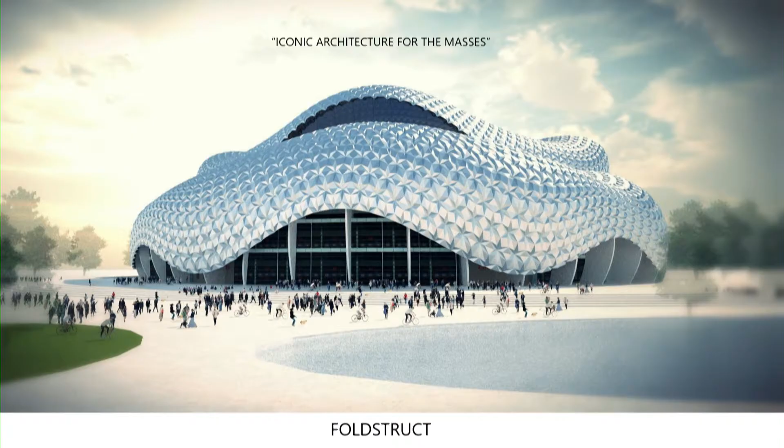So my main message with what I try to do is bring iconic architecture to the masses. I do this by exploring different types of building mechanisms. My main interest at the moment with Foldstruct is on folding as a mechanism of building. So instead of connecting individual small segments, we're talking about how to fold complete 3D elements.

So to talk a little bit about where we are right now, we have just gone through the digital revolution, which means we've gone from pen to paper to screen, from 2D to 3D, from local to cloud, CAD, BIM, AR, VR, AI. Soon we're running out of letter combinations. But all of these are representing our shift from the physical to the digital.

What this has created is a new generation of architecture that's redefining architecture, but also stretching the limits of how we want to view the society and how we can see the city of tomorrow.

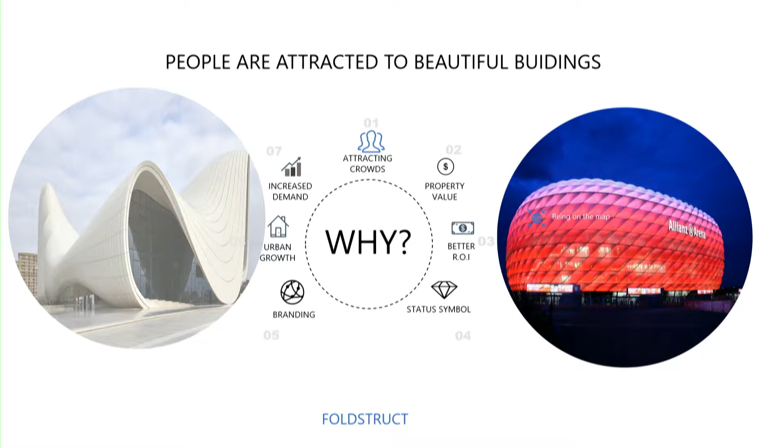So these structures, you may know, could cost up to 20 times that of a standard building, and yet they're still being built for the very simple reason that people are attracted to beautiful buildings. They will go from one side of the world to the other to see a pyramid. They are inherently attracted to beautiful architecture, and it is my belief that we should try to bring more of that, and more people deserve to enjoy that than the small segment that we have today.

So the main problem is the means of manufacturing, and as with the first industrial revolution, when we can change those, we can make a real impact on what we are creating.

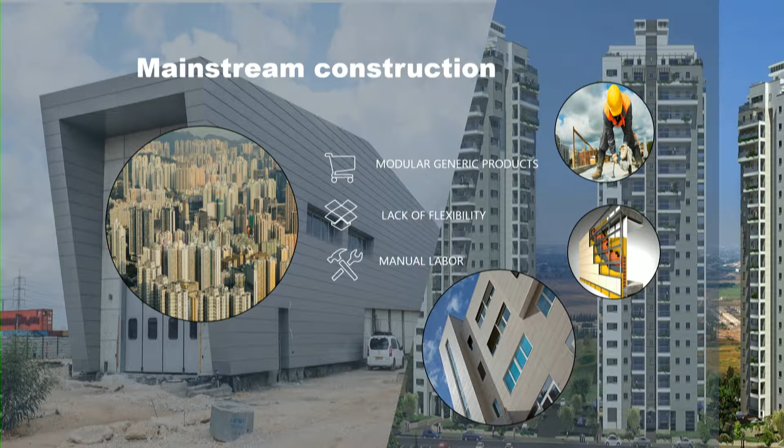So this is mainstream construction, unfortunately, today. We're seeing blocks stacked up one on top of the other, modular generic products, lack of flexibility, and manual labor. Now, yes, we can automate drawing plans, and we have all these great technologies for managing the building, and we're talking about optimizing.

But I think the question we have to ask is, what are we trying to optimize? Are we so happy with this that we'd like to see more and more of that? Or do we want to make building technologies that will allow us to transform this into something closer to what we see as an ideal?

And the main problem is the unique and complex elements. So when you have something curved or morphed, that means it's constructed from many, many, many types of elements. And that is a problem when we go into the manufacturing world.

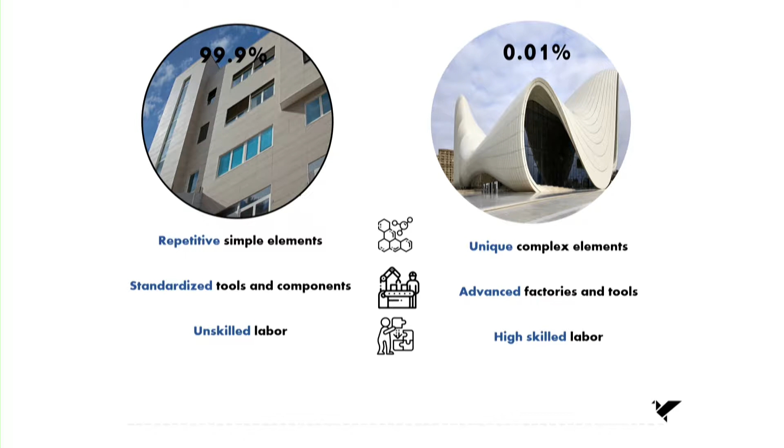So I worked as a parametric architect at a large office, and one of the main issues was that they brought me in for designs, but when I did those designs, slowly, meeting after meeting, the curves became less curvy.

From 3D, it became 2.5D, and in the end, it looked something like a cube with a small dent on it. So that was something that I realized - that if I wasn't going to change for myself, being a young architect, I would forever be locked in the digital realm. And so I did a master's in Detmold University and started a path of exploration of how I could maybe try to manufacture the things that I design.

So why folding? As someone by the name of Albert Einstein once said, things should be made as simple, but not simpler than that. And the idea here is that we need a mechanism which is simple enough and minimalist enough that we can use and can also adapt. But we should not simplify something to the place that it's completely repetitive.

So for me, the question is how to go from digital to reality. This is a project that I built with the support of 3A Composites, Alucobond, and Detmold University of Applied Science. And this was actually a project that came as a byproduct of my thesis, which tried to ask that question: could we use folding as a mechanism of construction? So using that material that we use today just for cladding, could we make that the actual structure, something like origami? And of course, I don't work alone in this field.

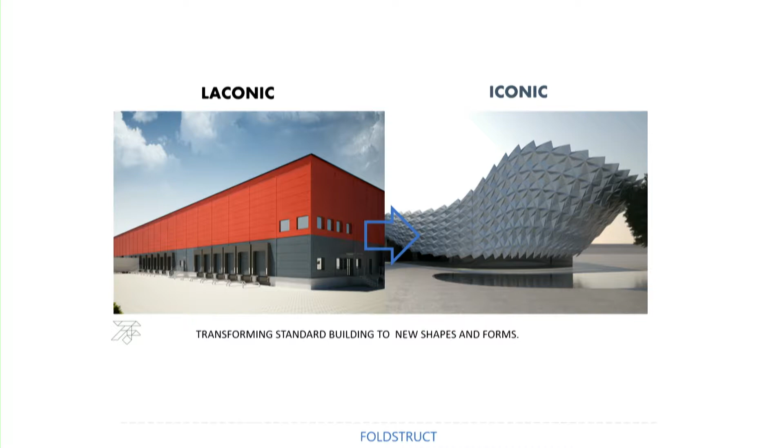So the idea is to go from laconic to iconic. Could we take a standard building like this and give it a facade? If we don't have the barriers of the costs, what would our world look like?

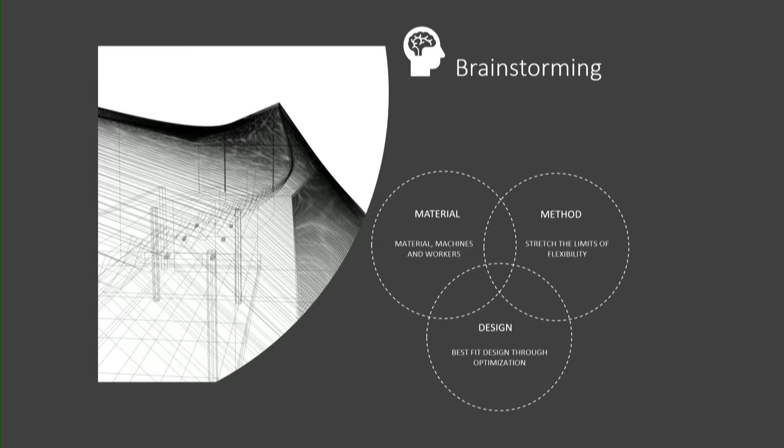The way that I work is, I would say, with a trinity of material, method, and design, where I could start with any one of the three, but they all have to match. So if you start with a material, then you kind of have to find your limits, and I think that is the most important thing - to first follow the limits, and from that you can work your way.

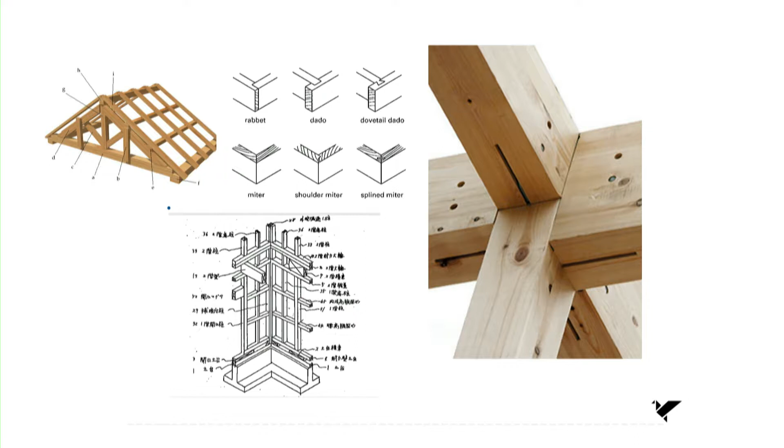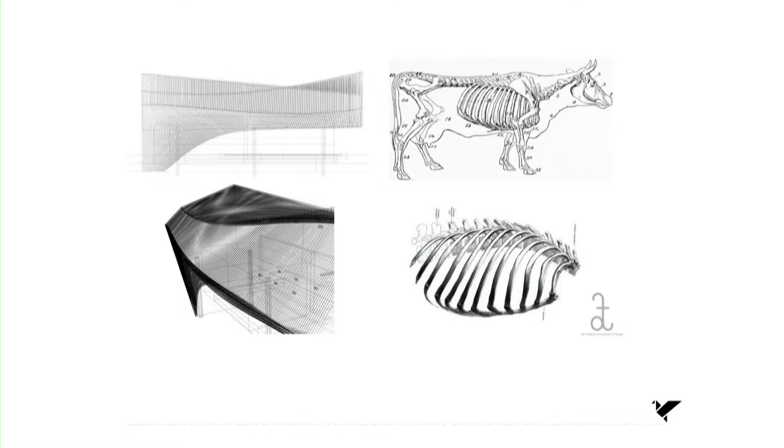So here's a project I did with wood, which takes Japanese wood joinery and asks, okay, we have that orthogonal angle. What if we learn to play a little bit with the cutting and produce things that would look a little bit different? So being inspired, of course, always by nature and how things can morph and yet still be in the system, I tried to take that and play a little bit with wood logs.

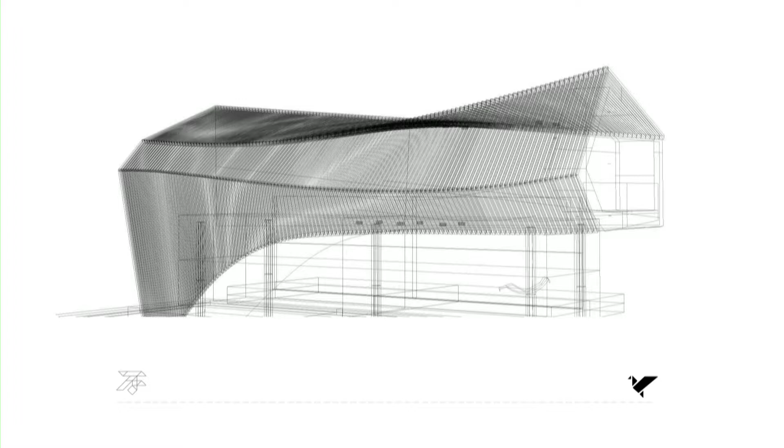So this is a design for a house whose shell is made out of simplified wood logs that are just cut at different angles. You can see here that all of the designs that I do, I work on parametric design and try to reach the exact angle for each specific element in the initial design. So not just designing and then bringing that on to a company, but actually trying to solve that and getting the form coming from the actual detail.

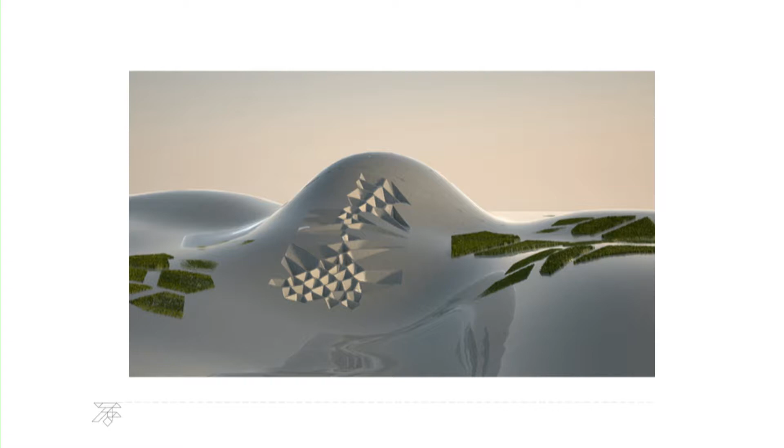We can also do the same here and build other things. And the idea here was, how do I take that system, which is also orthogonal, and turn that into something a bit more amorphous? How do we take a structure like that, which I designed completely freeform? Could I be able to build that from wood logs or something close to it and come to results like this?

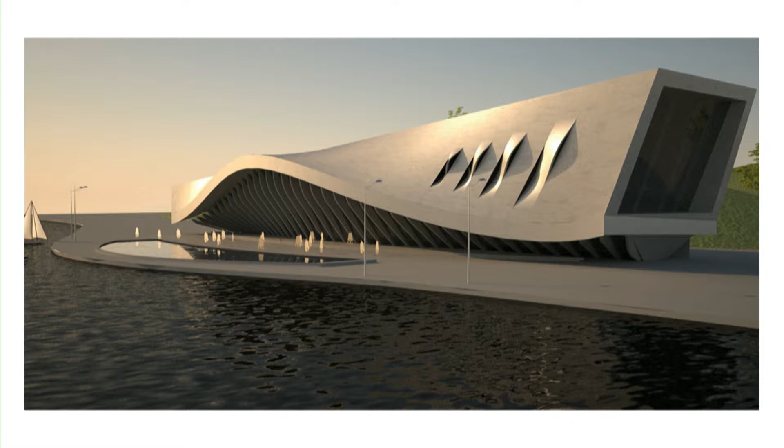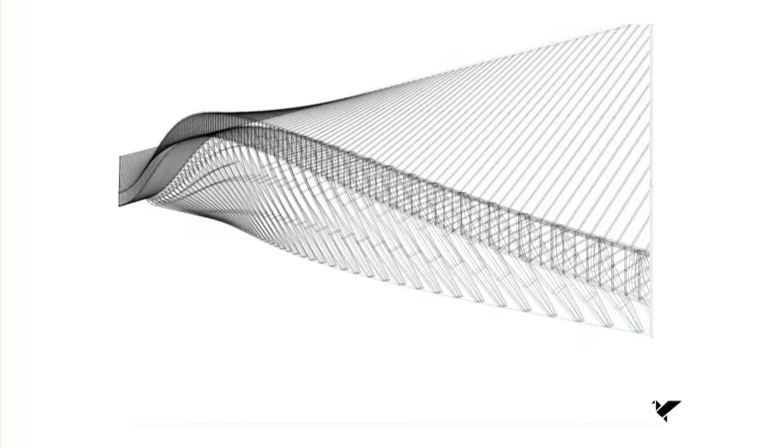This project was a competition for a marine museum, and the idea here was to play with straight lines. So even though this is curvy, it still works on the geometry of ruled surfaces. And here the idea is not to bend an actual surface, but to build that out of straight elements that could later be used as substructure, as rebars, and as elements which are always needed. So you can see here that the design, again, always working side by side.

So now coming to the Foldstruct project. When I started out, I didn't have too much of an idea of what folding can do, but the idea was to explore it and ask if we could create a structure out of a piece of paper just by playing around with it using our hands. What if we apply a bit of logic, just like in origami?

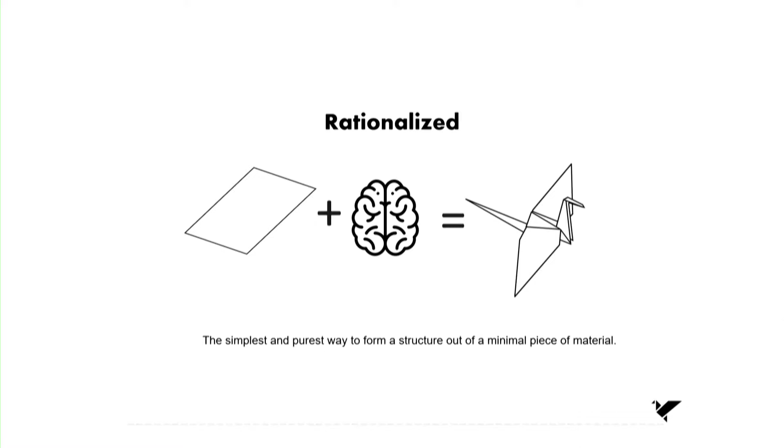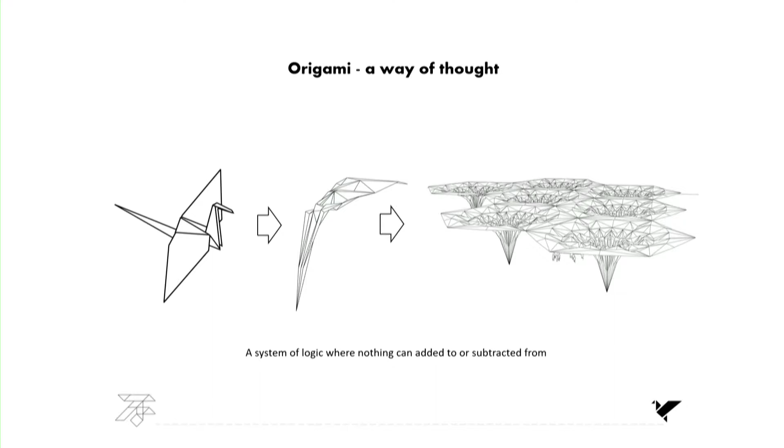If we take that same mechanism and apply some kind of logic, we reach these kinds of elements. And if we can fold a paper crane, maybe we can also fold a structural element, maybe combine them together. That's when I set out on a journey to explore what could be created from those.

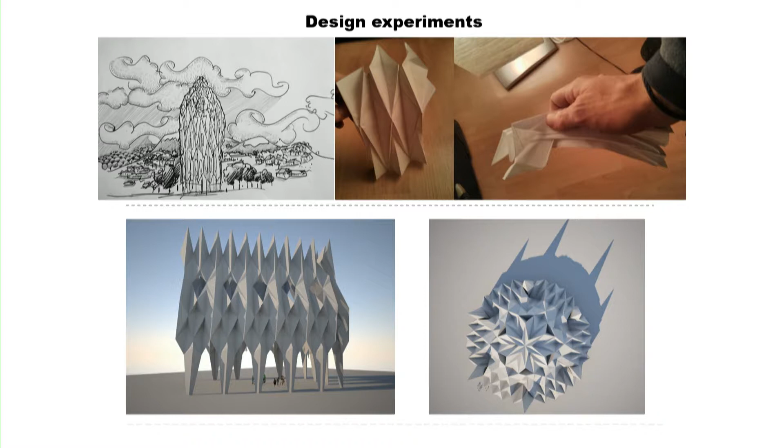Starting with some initial experiments, I always like to explore the opportunities and the visual aspects, without going into the scale of exactly how it's going to be done. But I think there's a large potential in approximating different types of geometries with folding morphologies.

One of the things I like to follow is folding as a mechanism, as a science, and as an art, because I think it really combines all of them together. I work and develop different types of patterns, and each pattern for me is a representation of a geometrical family that could come out of that pattern.

A typical day for me can look something like this, folding a lot of different patterns. I have a few hundred of them which I kept, and each one is maybe a glimpse of what could be made if we work on that pattern and think about what it can be in the future.

The main interest here is that we can follow Gaussian curvatures and describe forms that seem free-shaped at first. We could define those with mathematical relations and ultimately fold them.

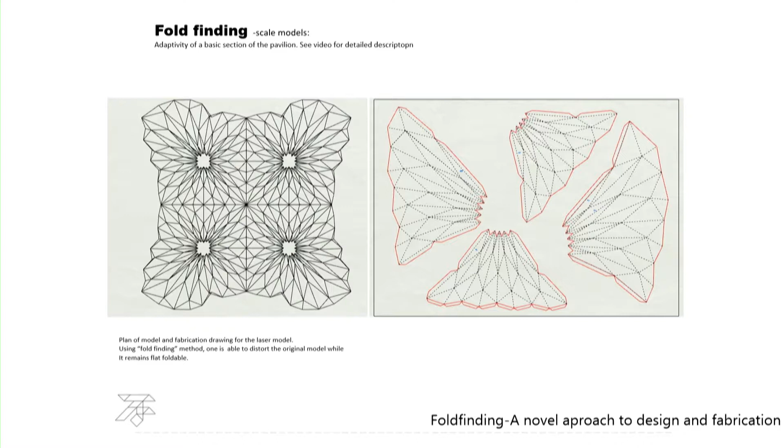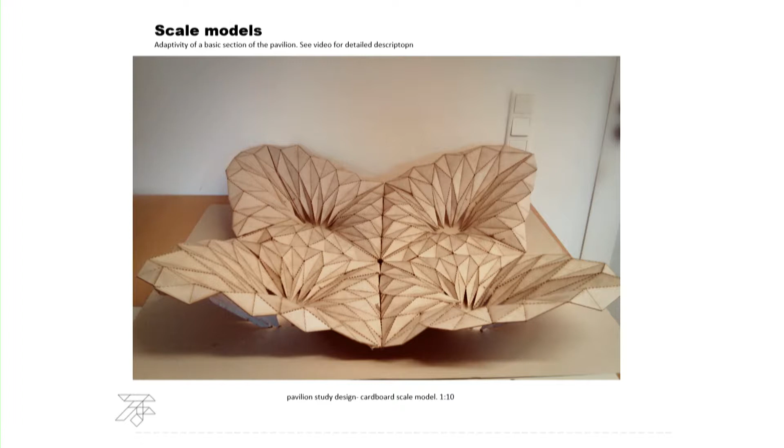Going back to experiments, the main issue with folding is that you're designing something in 2D and you're not sure what you'll get in 3D. The art of origami has always worked by having a vision and making that in 2D, then getting somewhat of a close result. In architecture, unfortunately, it doesn't work like that — we have to know exactly what our boundaries are and how it looks and behaves in the three-dimensional realm.

Exploring a little bit the different types of patterns and population strategies, we can take one module and from that build our way to complete structures.

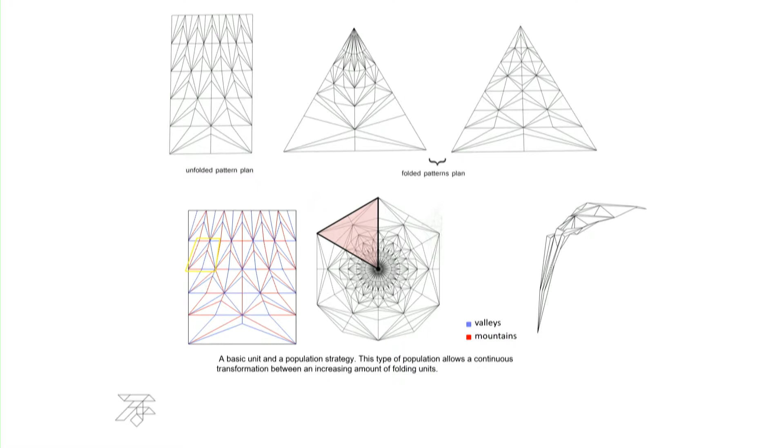One of the things I do is play around with renders like all of us, and I try to find variations of what I would like this to look like in the end without actually having a plan. I have a great love for Japanese arts in general, and I always try to combine different types of arts.

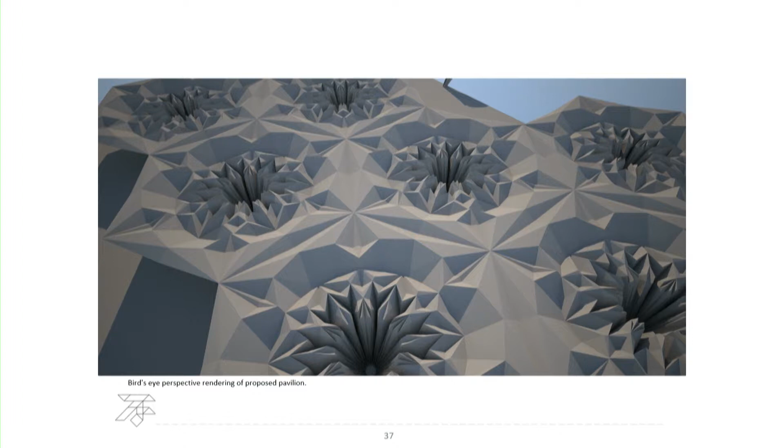Here's a pavilion design that tries to take this module and upscale it. The initial design for the pavilion was done in many different forms, and the idea was to find what my limitations are.

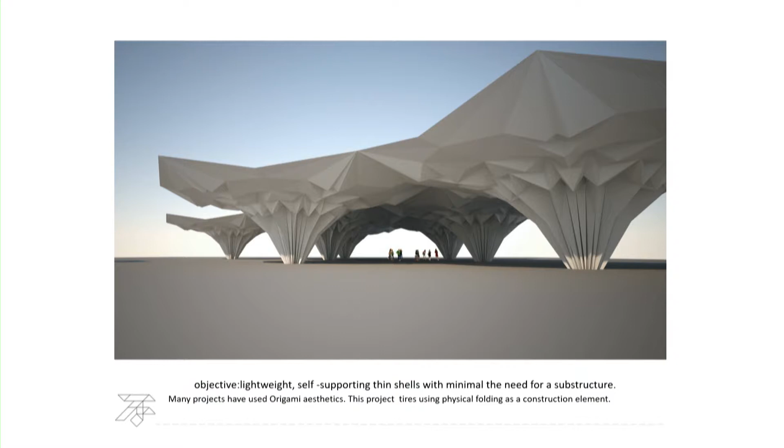Of course, we have a CNC router and certain materials, and we're very much limited to what we can build. The design should also be a tool to limit ourselves and get to the ultimate design in the end. This was the actual design I started out with, but then, as you learn these restraints, you see that not everything you can think of can be folded or manufactured — there are so many other factors that have to be taken into account.

This is a bench that was created with one sheet of aluminum — a 4 millimeter ACM panel. I was lucky enough to be supported by the team at 3A Composites and Alucobond, who were very keen on seeing what could be done with new materials.

This bench was actually the first example of this kind of structure, because we could fit about 3 people, or 300 kilos, on it without it breaking, with only 4 screws connecting everything. Compared to standard fabrication, where you'd have to weld each piece and then repaint it, I think this is a very efficient way to design and build.

So the way I like to look at it is complex algorithms, but always simple construction. The moment we step out of the simple construction realm, that's when we have a lot of problems. Unfortunately, I don't, and I think young architects in general don't have the privilege of having Arup or Buro Happold or all these large companies behind them.

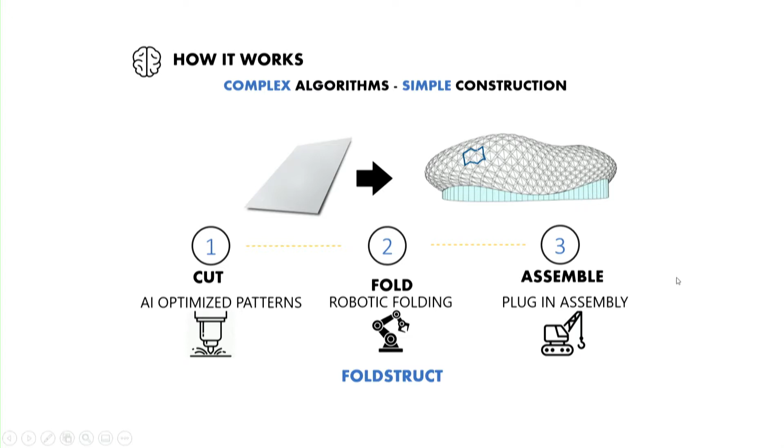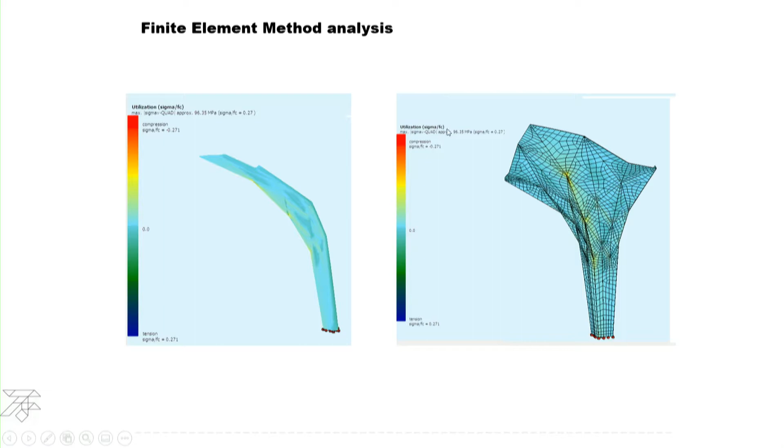So we did some finite element analysis. Here, the first step we did was a simple thin shell, which assumed that it wasn't folded, but just coming out of a mold. And the results did not fit with what we wanted, since we are, of course, folding everything. And then we thought about the fold as a structural member.

How do you take into account the actual fold and embed that in the final static analysis? It's very important because when something is done in such a way, you have a lot of forces that you are adding and also taking away from the material.

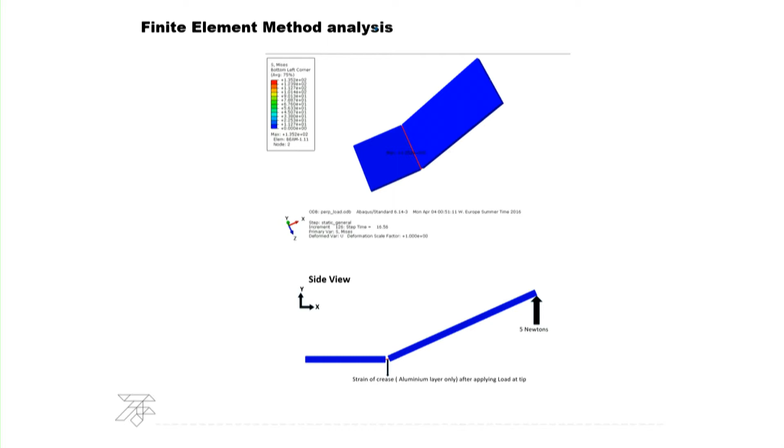So this one example gave us a new model to make an analysis that was much more correct, but also parametric, coming directly from a polygon model. So we don't have to go to every piece and make an optimization, but it's kind of a direct workflow.

So here you see the initial design, which does not have these folds embedded, and then you can see the forces have a different way of flowing than when you actually embed them. Because when you fold, all of the forces are flowing through the fold lines.

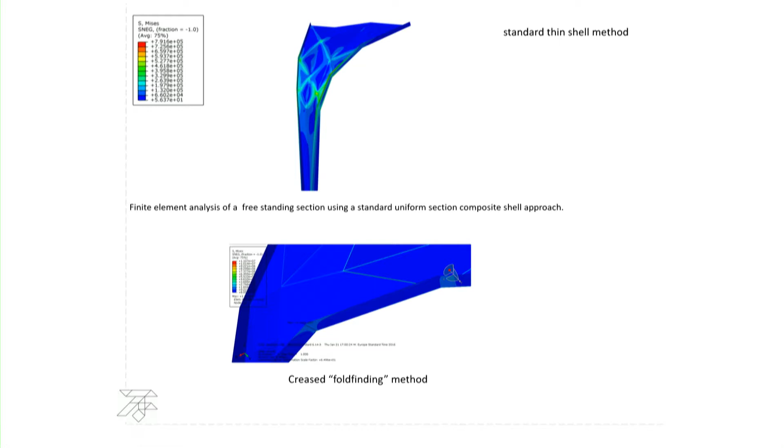One of the interesting experiments was when a part of it collapsed, we were able to bring it directly back up with no damage because it just collapsed along the pattern. So that's a very interesting attribute about these things, is that they don't stretch or deform when you are folding them, but only along the fold lines.

So the actual fabrication here was a very long process, but if we count the actual fabrication time without the long breaks, it did not take more than 10 days. And what was interesting here is the lightweight.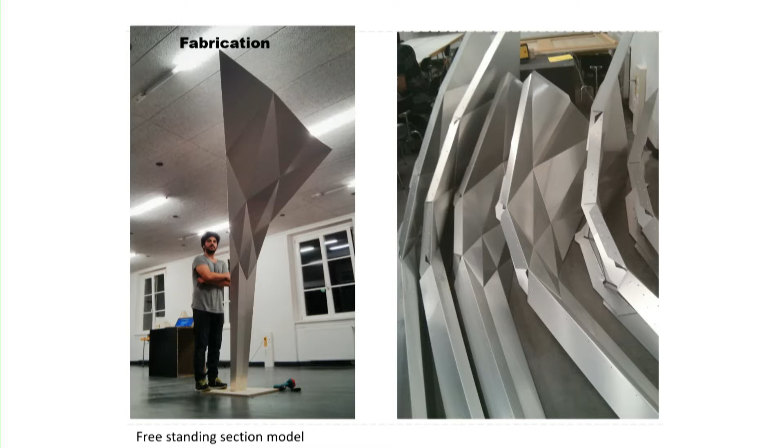So here I'm not supporting this in any way. It's bolted down to this little wood plate, and I'm holding the wood plate. You can see this element here weighs less than 10 kilos, so we were able to work in a very efficient way where one would be just holding it and the others would do the screwing.

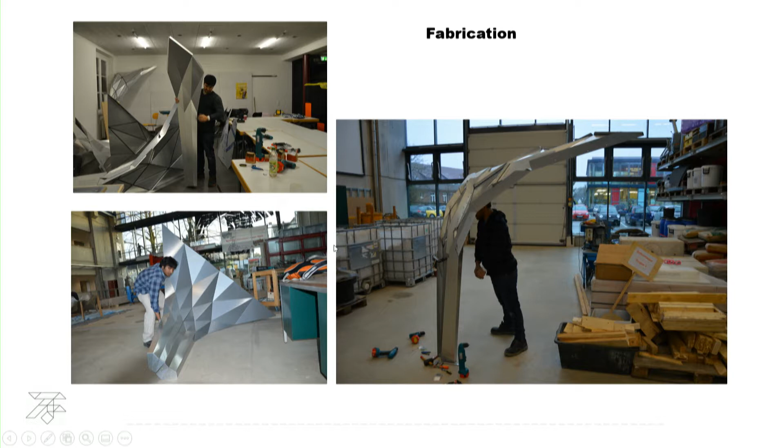We were actually two people doing this, me and engineer Muali Manoj, who also helped me with the engineering of this. This is what it looks like in the end. And you can see the main advantage here is that you have very, very high precision.

And if you wanted to build that in a standardized way, you would need a lot of nodes, and every node would need to be unique. And the prices of such a thing are extremely high and unfeasible for everyday architecture.

So if we can minimize the substructure, the nodes, the bars that we need—I'm not saying we have to give everything up, because sometimes we tend to take a vision a bit too far. So it's all about finding the way to reduce the expensive elements, and that was an interesting example of that.

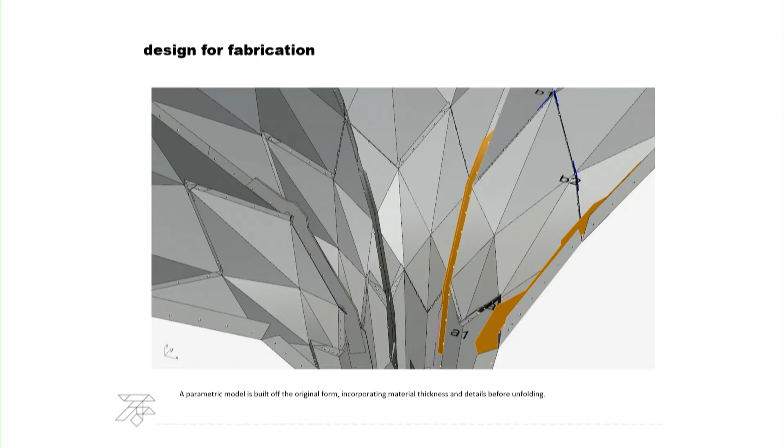So the design for fabrication here, everything including the thickness of the material, the screws, and the overlaps, was taken into account directly from the polygon model, going into the finite element analysis, and having basically a workflow that allows us to take any form, optimize it, and then bring that directly to the manufacturing floor, having done all of the analysis that is needed.

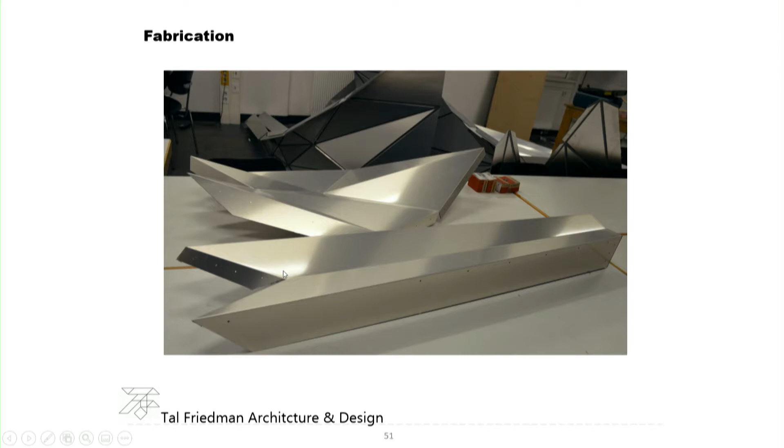As you can see here, these sheets were constructed out of the folding, and you can see all these different plates which you would normally have to either weld or connect. That was all done by folding, and then this thing came together to form the final shape.

So here you can see what this was like on the backside. I'd like to share with you a movie that describes the whole process of how we built it and also where we see this going.

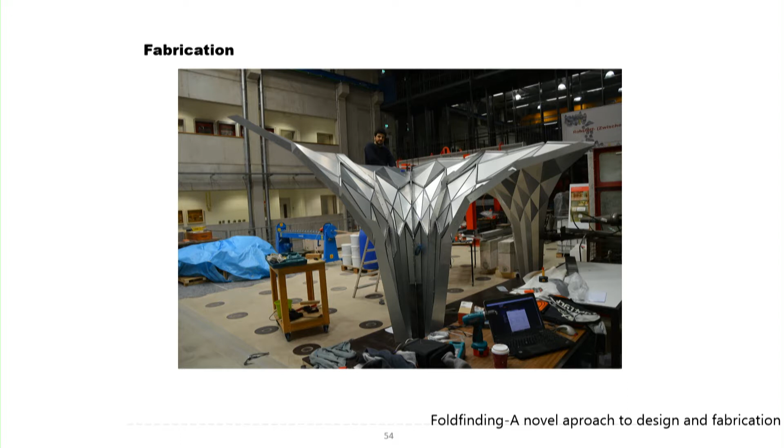Everything we did here used complex, or maybe simplified algorithms, but we had to do this manually. This is basically a project that asks how we can do something with the least amount of effort possible. While we did this manually, all the cutting was done with CNC. But the next step is to make the folding robotic.

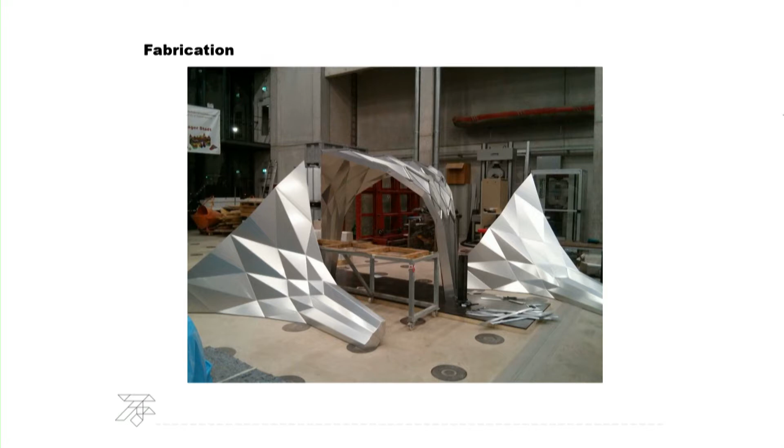So we had Boston Dynamics. We have a huge robotic movement right now, and looking into autonomous construction, if you don't need the mold anymore and you don't need those heavy processes, how can you bring sheets on site, fold them, and get any form you want? That's the question we're trying to solve at Foldstruct.

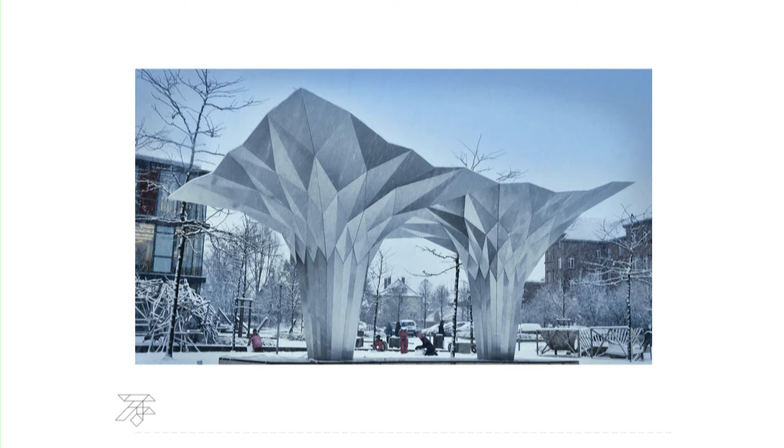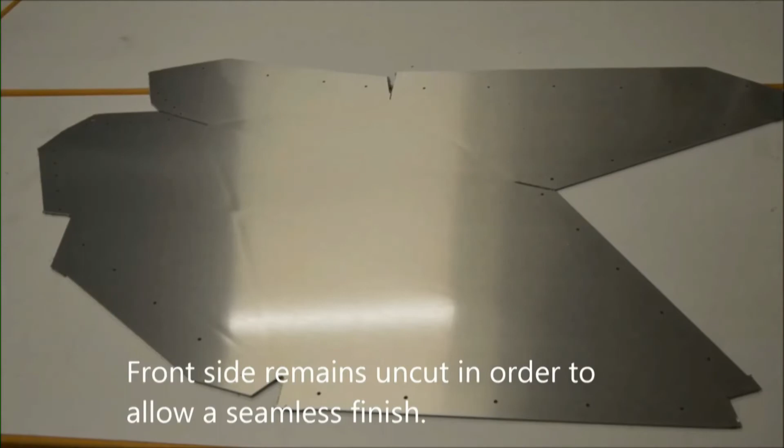So now I'll share the movie and I hope the sound works. You can see here the process of getting every single piece milled out, folding it according to the path that we know.

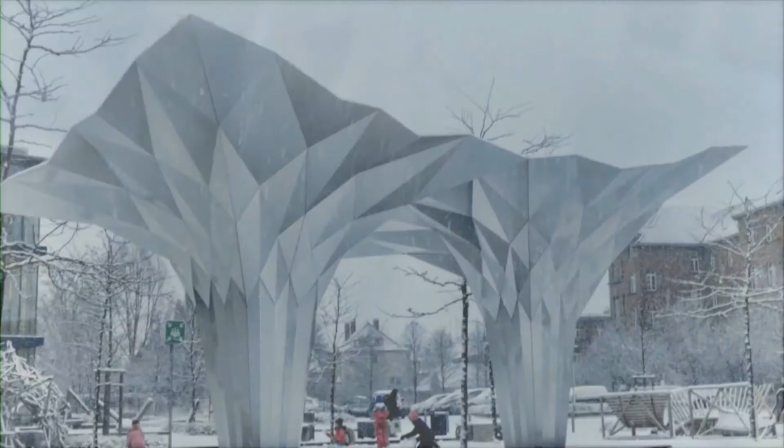And then I'll move on to describe how we actually built it. This is what we just talked about.

And this is the autonomous folding. Here what's interesting is that we're going beyond the design and into actual dynamics, asking how do we deform something from 2D to 3D in reality?

What is the path that one has to make in order to reach it? And how can we describe that in a mathematical way that could be transformed to a computer and then to a robot ultimately? Because what looks very random actually has very precise math. Even when we fold a piece of paper and get a huge mess from it, there is an underlying logic, and this is what we're trying to solve.

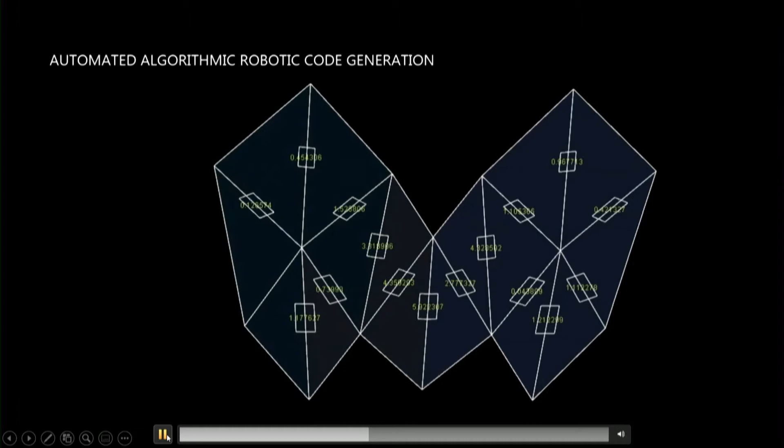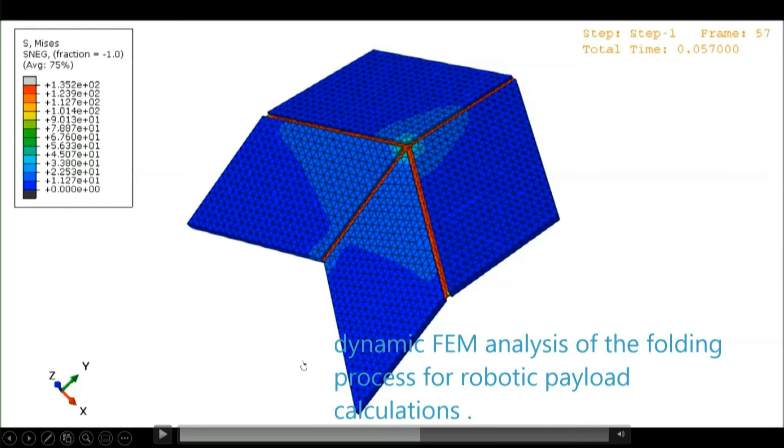So this is how something like this would work. Attached to a KUKA robot, we could then take these and place them on site. Finite element analysis can show us how the forces actually behave during the fold process, which is very important for the robot to know how much it needs to fold and how much force it needs to apply.

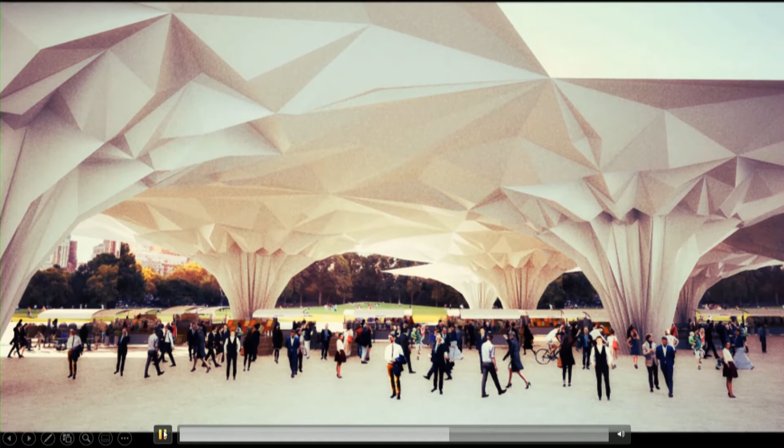Going on to Industry 4.0, how do we turn the work site into a factory? These are standard panels, and we're taking exactly the same method and applying it in a different way — same materials, same methods, but done a little bit differently.

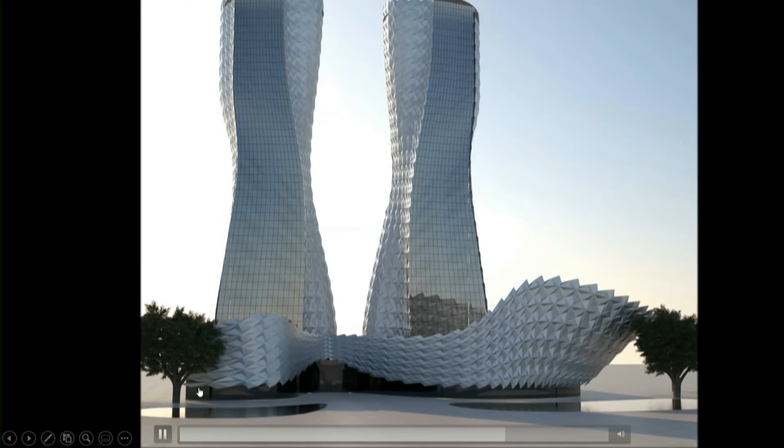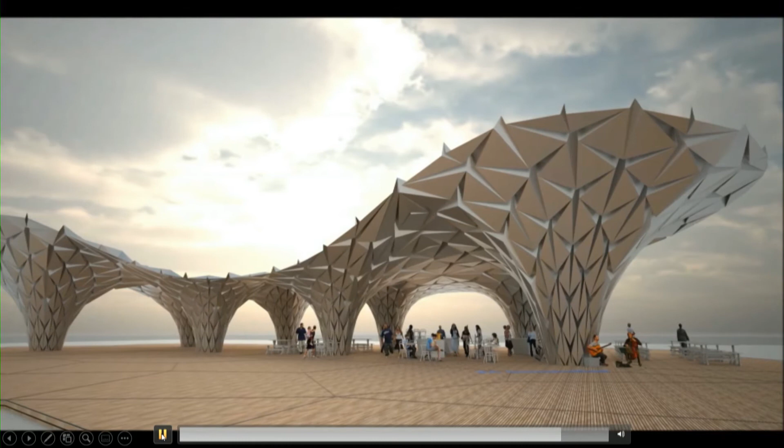And then different types of applications that we can have. Some of them will be modular and some of them can be morph. This is a new pavilion design, hopefully to be built sometime soon.

Sorry about that. And for the next one...

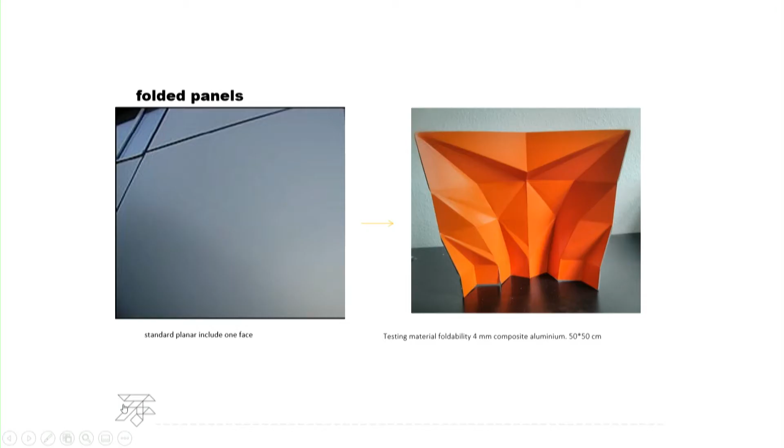Okay, so the main question is the applications. Let's say we solve all of this and have a working mechanism — what can be done besides pavilions? How could this affect something like the facade market, which I think is one of the most influential aspects of a building? If we look at house costs, the facade is what makes a building iconic or not, and I think the most influential thing architects can do right now is work on building envelopes and facades. Here is my take on that.

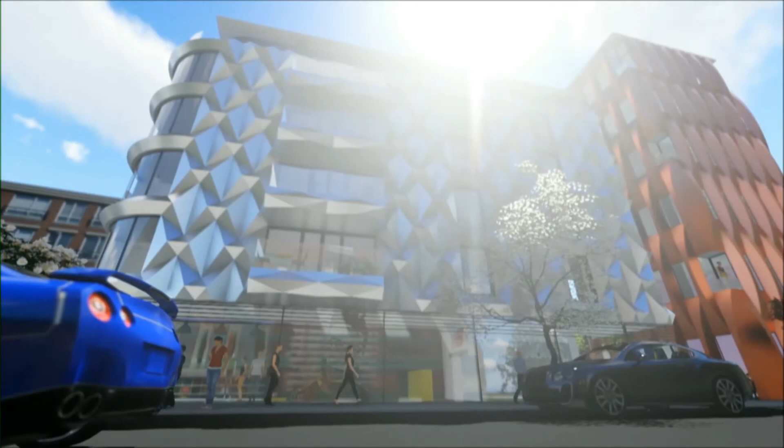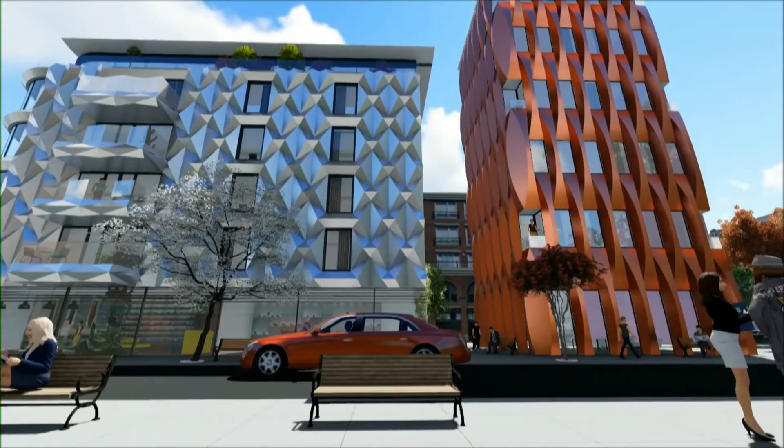So the idea was, how do we take this and apply it in a certain city, or how many could actually be built like this without it looking like more of the same? Here you'll see some design experiments ranging from modular, curved folding, regular folding, and then going on to something a bit more freeform.

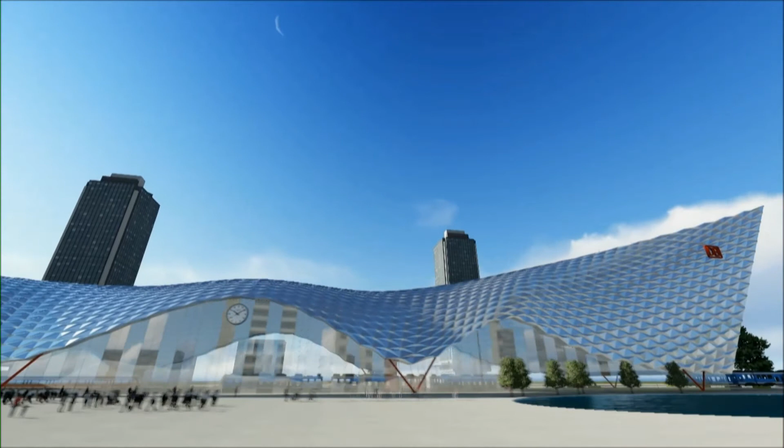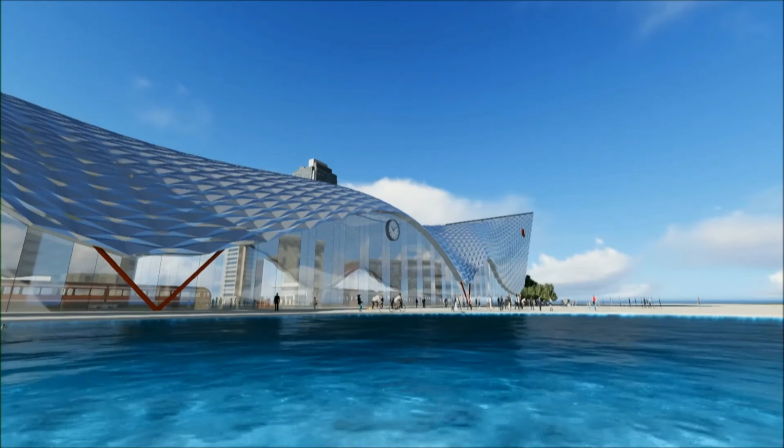Okay, so this is the freeform design, which says that every single element is going to be different. So while we're using the same tools and the same kind of 2D elements, everyone will be cut different, folded differently, and assembled differently.

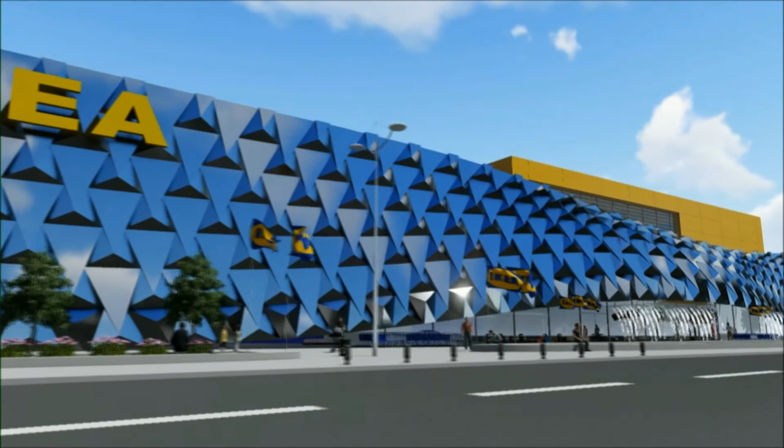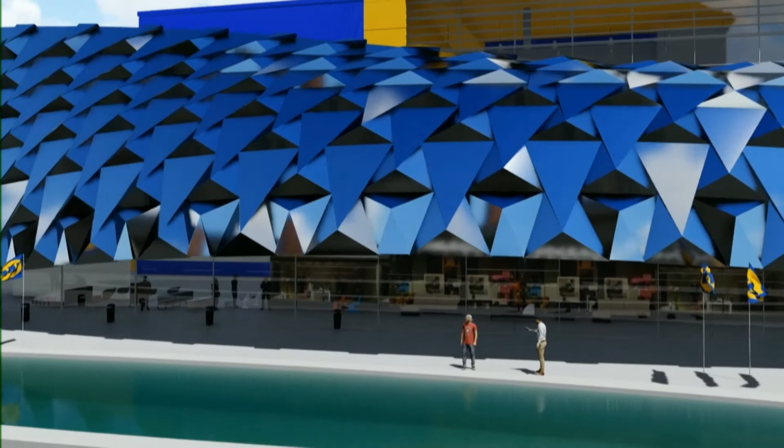So how could IKEA look like with a technology like this? Should IKEA look like a block, or do we want to use IKEA as kind of an icon in the city? Because in the end, it behaves as a modern cathedral, that's where people go to get inspired. And how can we let everyday buildings inspire us on the everyday scale?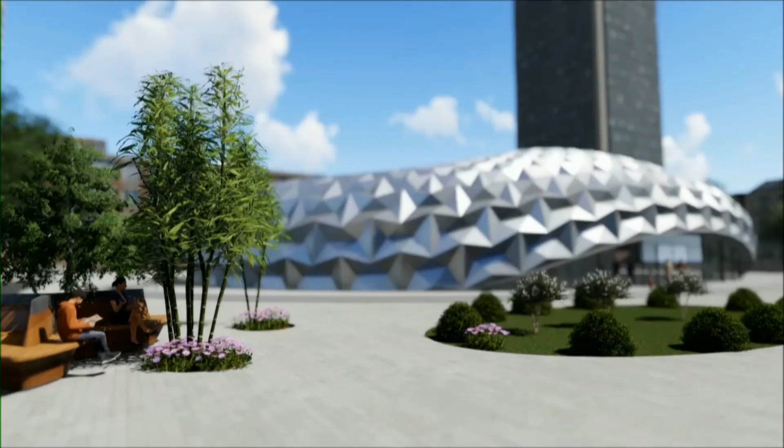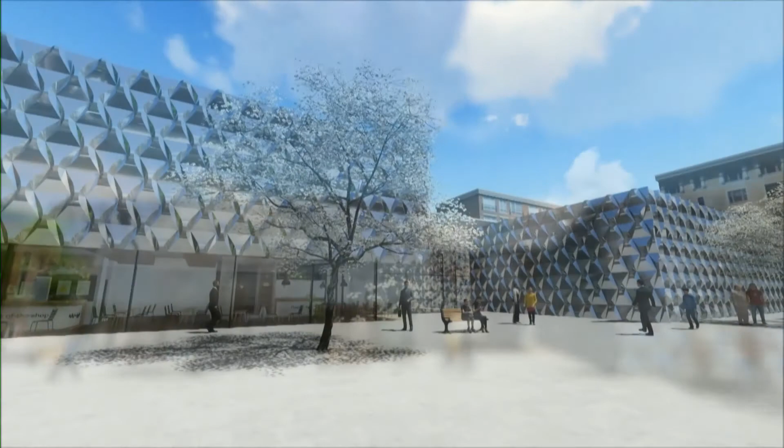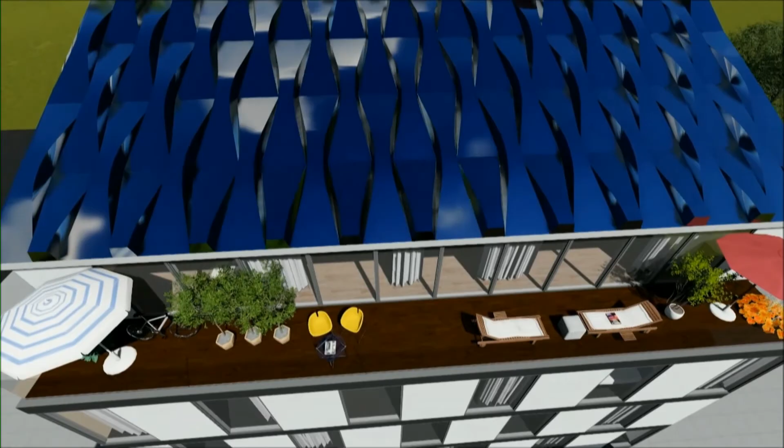So this is a little bit of a smaller scale here, just to try to see what type of modules can be used. These are modular elements, something very similar to the bench that I described earlier, but just with facade elements. Also using that as a roof. So here it's used one time as a facade, combined together with a roof.

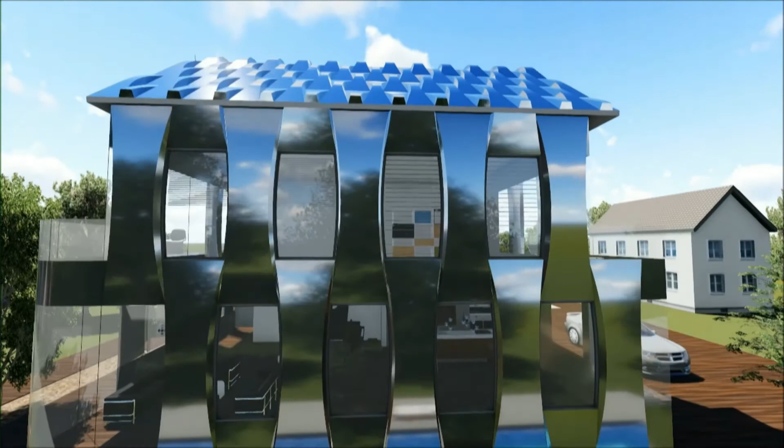This is an example of how we can take things that are today white elephants in the city, and how we can give them a new skin, and maybe also give them a new meaning. So someone who's living next to something like this today would say he's living in the worst part of the city, but maybe we can use them as elements and icons to provide some added value. And this is where I personally would like to go the most, and that is to amorph structures.

Thank you very much.